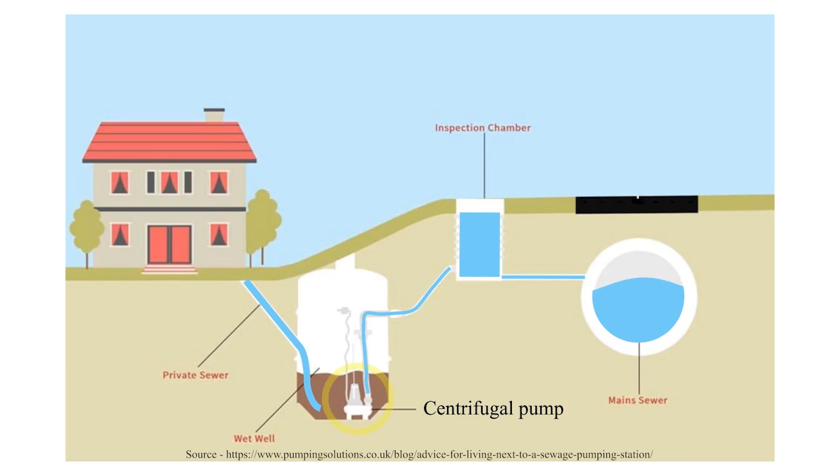Do you know how fluids are pumped from your sewage system even with suspended solid particles in it? Centrifugal pumps with semi-open single-vane impeller can be the suitable solution for this application. In this video, we will have a conceptual overview of the working principle and kinematics of this pump design and understand why it is suitable for applications in wastewater treatment, agriculture, oil and chemical industries in 5 minutes.

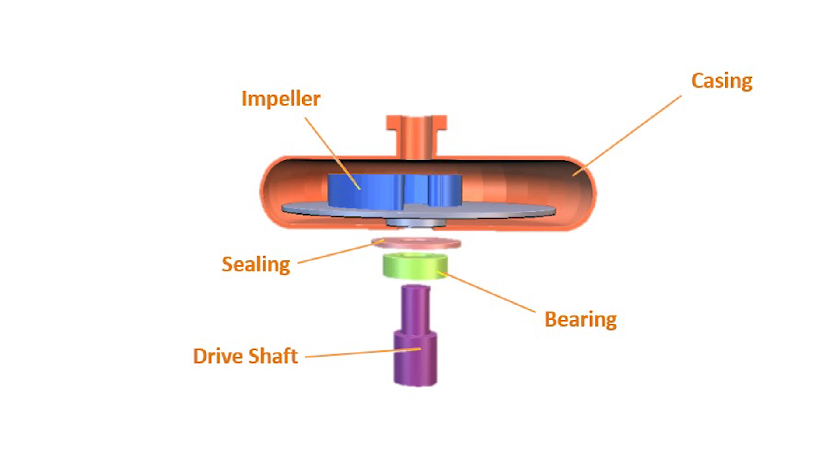Pump components. Every pump has an impeller. In the case of single-vane impeller, the impeller blade could be built up from a simplistic curve. One side of the blade is attached to a shroud, giving it more mechanical strength. The other side of the impeller is open. This is why the design is named semi-open single-vane impeller.

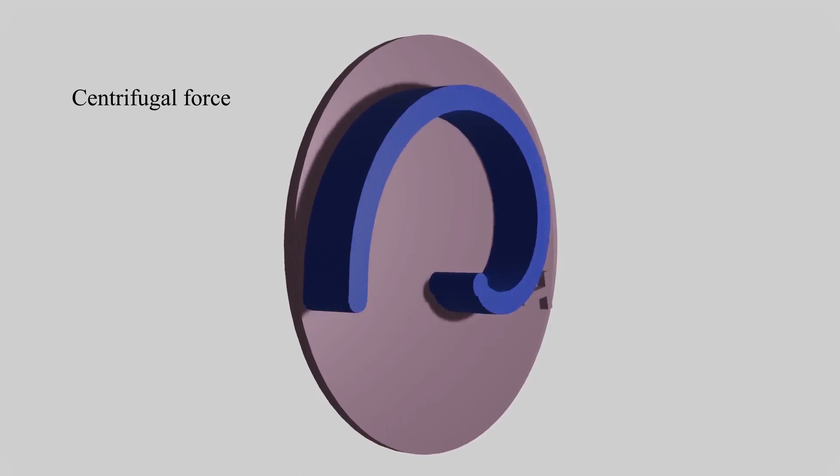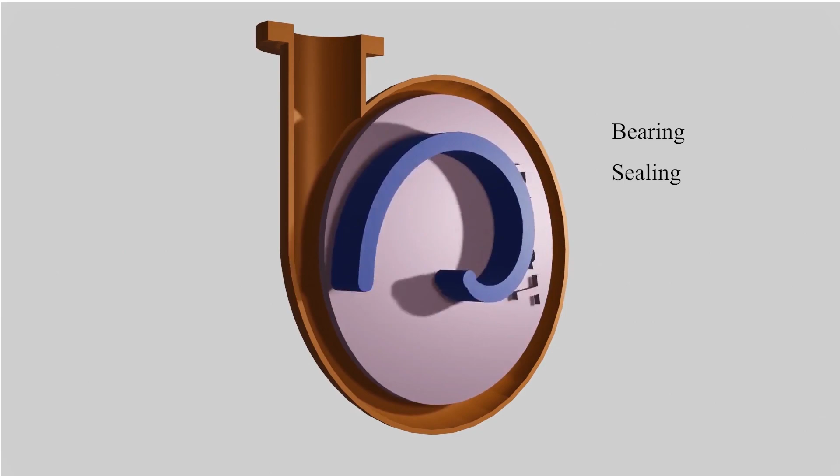When the pump is in operation, the impeller rotation facilitates the action of centrifugal force on the fluid and creates the flow. Another main component of the pump is the volute casing, which helps to navigate the fluid flow from the inlet to outlet. An important thing to note here is the increasing area of cross-section of the volute. There are still other important components inside a pump such as bearing or sealing. However, these components are outside the scope of this video.

Working. The liquid that needs to be pumped is collected through the pump inlet and the impeller is usually immersed in it. When the impeller rotates, it also imparts centrifugal force to the particles of the fluid and thus causes the surrounding liquid to rotate. In this way, the rotational mechanical energy is converted into the energy of the fluid.

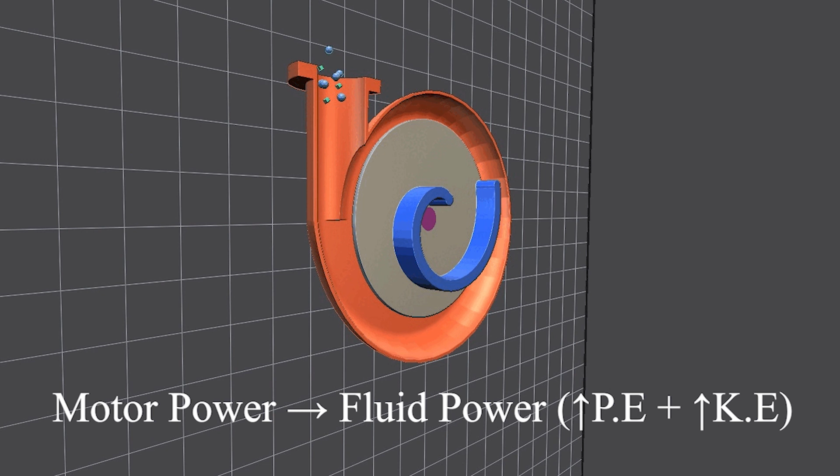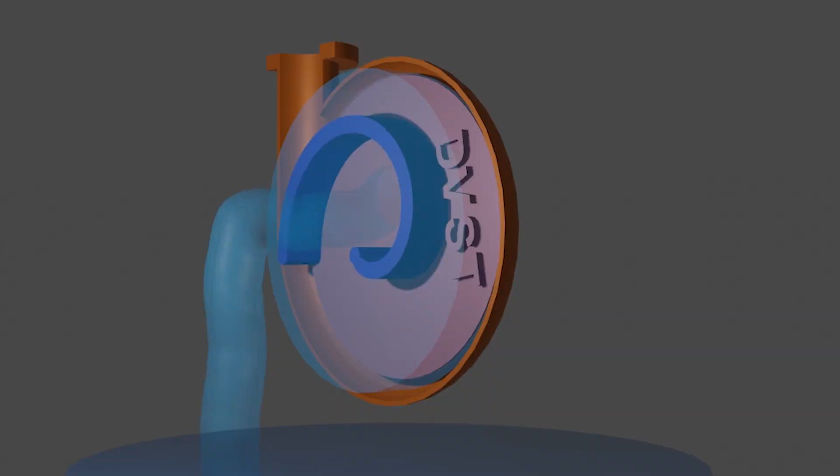The fluid, when it goes out of the impeller, will continue to move along the volute wall towards the outlet. The progressively increasing shape of the volute accumulates fluid at the discharge end and thus increases the static pressure. Meanwhile, at the suction end, this displacement of fluid causes negative pressure. This draws in more fluid into the impeller and continues the process.

Due to the huge spacing of the impeller blade, single-vane impeller allows the passage of small particles and slurry suspended in the fluid, thus reducing the risk of clogging.

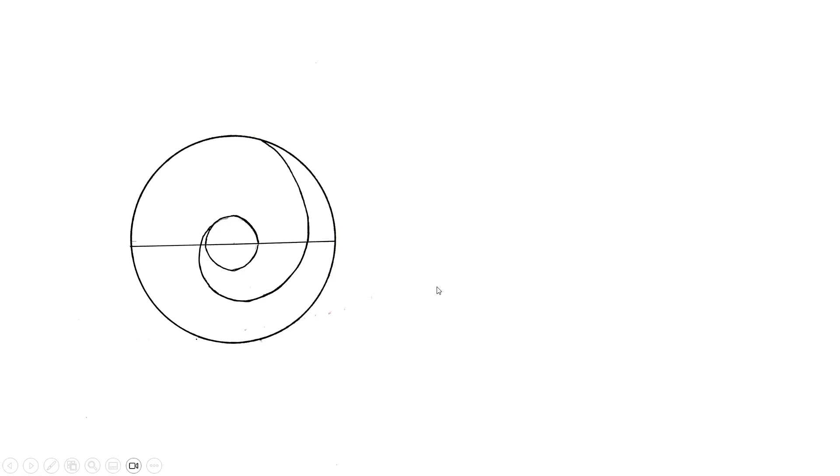Kinematics. In this section, the kinematics of the fluid and the pump is explained. The study of different components of flow velocities is important to understand the kinematics of the pump, and this is done graphically using the velocity triangles concept. These velocity triangles can be drawn at any specific point of the flow path.

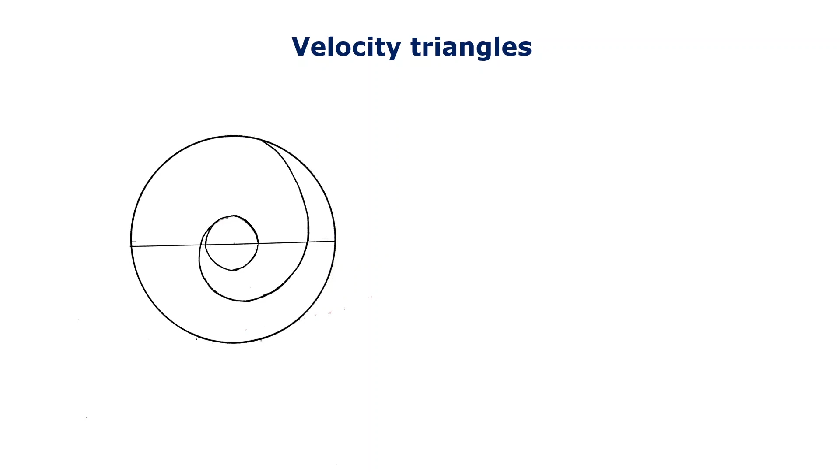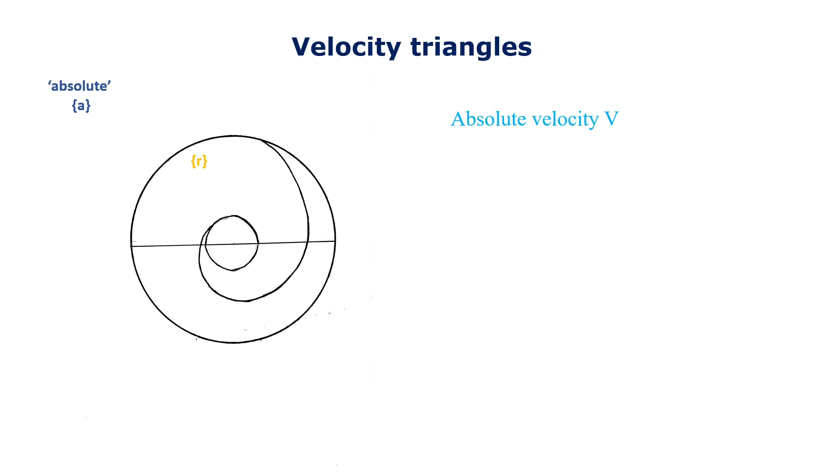The flow described with respect to a fixed reference frame is said to be absolute, and the flow described with respect to a rotating reference frame is said to be relative. So, the velocity of the fluid observed from the casing, which is a stationary reference frame, can be called absolute velocity V, and the velocity of the fluid observed from the rotating impeller can be called relative velocity W of the fluid. We can say that the relative velocity takes into account both the absolute velocity of the fluid and the rotational speed of the blade.

Hence, the blade velocity U, which is the result of the rotation of the blade, can be defined as the product of angular velocity omega with the radius of the specific point of the blade. The relative velocity W is given by V minus U. In a rotating device, the relative velocity should be tangential to the blade profile for smoother flow.

Now we know how to calculate W and U. We can calculate V by rearranging the above equation to V is equal to W plus U. So the vector V is the resultant of vector W and U. This vector triangle formed by these vectors is called the velocity triangle.

The velocity triangle can be drawn at the inlet in a similar fashion, and these help us do flow calculation for the pump, which is essential to determine the main dimensions and blade angles of the impeller for a specific pumping task.

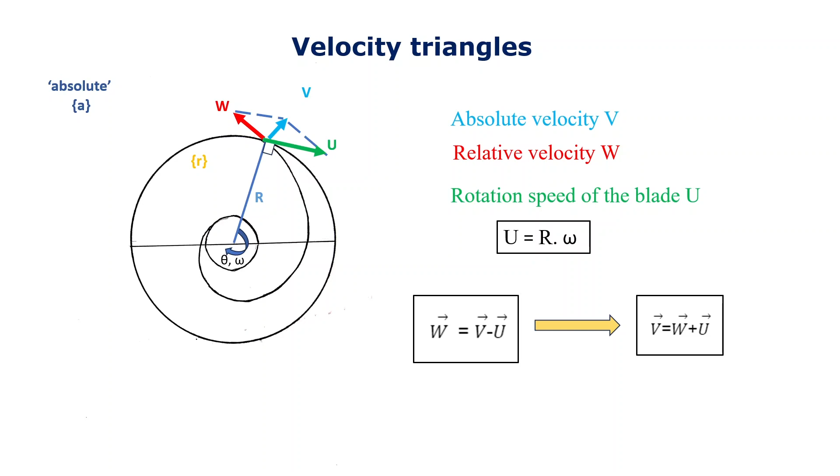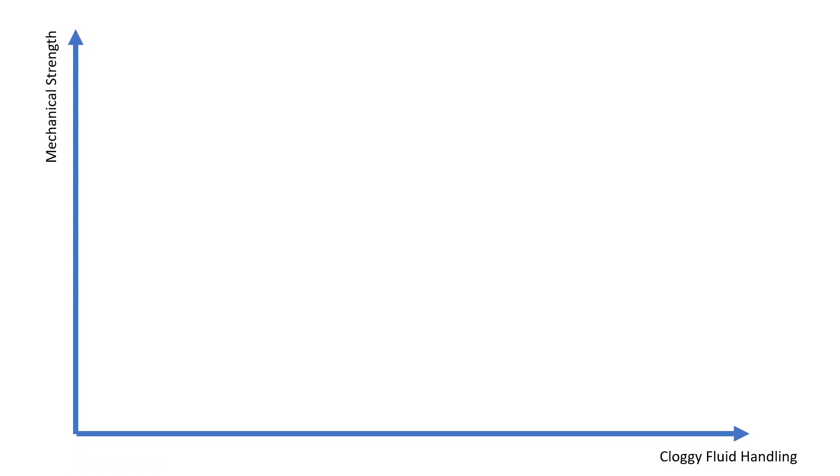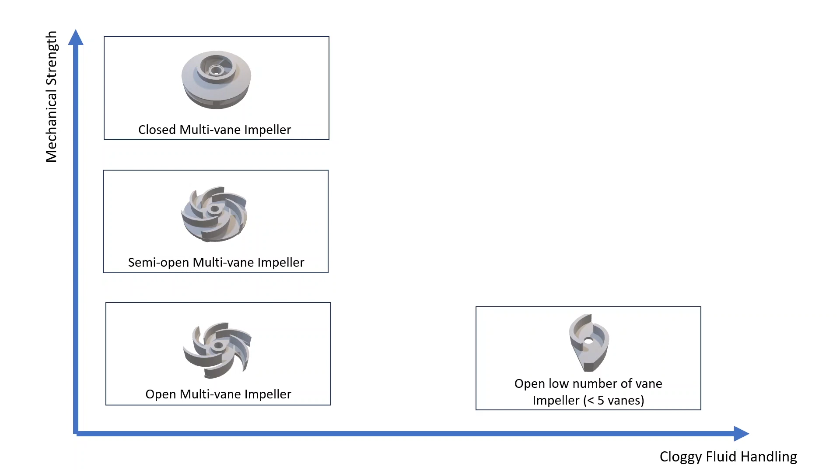Comparison of impellers. There are several types of centrifugal impellers, normally classified by the number of vanes and shroud configuration. Generally, impellers with a high number of vanes are not suitable for handling cloggy fluid due to the small clearance among vanes. Meanwhile, impellers with a low number of vanes, such as single vane, perform well in this aspect. The shroud configuration also plays a role in the mechanical strength of the impeller, which is important to the stability of the pump. To strike a balance between clogging and strength, semi-open impellers with fewer vanes or even single-vane impellers can be employed.

Comparing flow rates. Single-vane design can support higher volumetric flow rates compared to multi-vane design as it has much more free area, reducing obstruction to fluids. However, multi-vane impellers can provide smoother flow as the fluid gets distributed more evenly among multiple vanes.

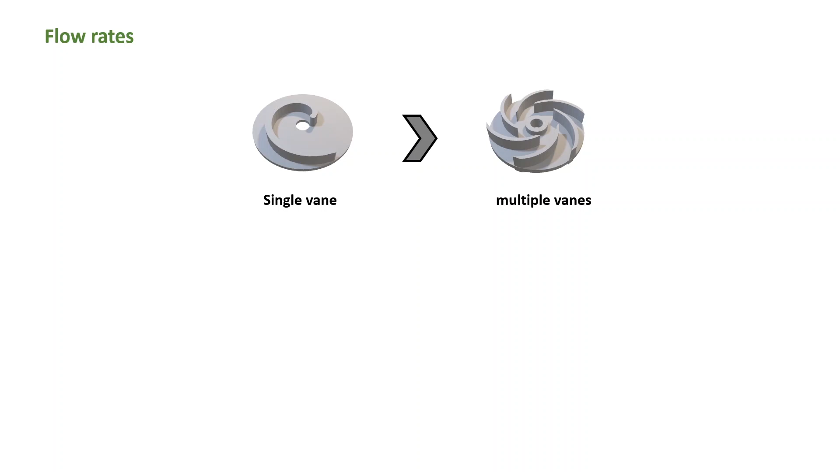Comparing maintenance, wear and tear. Open and semi-open impellers are easier to inspect and clean. Closed impellers have a longer lifespan and better resistance to wear due to reduced exposure to solids and abrasive particles.

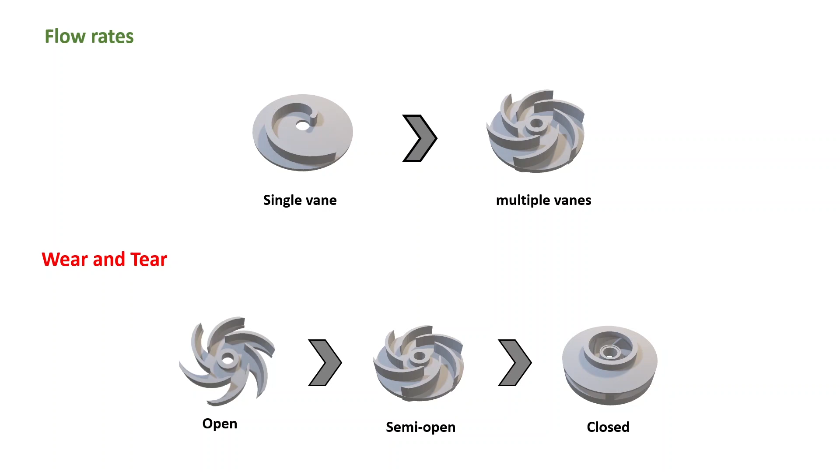Summary. In this video, we have discussed typical applications, the main components, the working principle, the basic kinematics, and the comparison with other impellers. Thank you for watching the video.